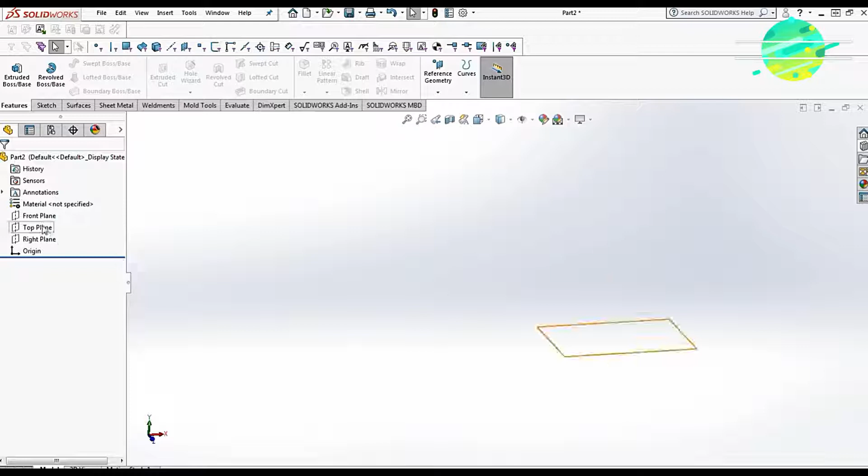With very simple steps, just select the top plane. Once you enter the sketch mode, select the ellipse and draw an ellipse. Make sure these 3 points are in alignment, so I will take this as horizontal.

Now I have to provide the dimension. I have to select the dimension tool, so provide these dimensions as 150, provide this dimension as 150, 150.

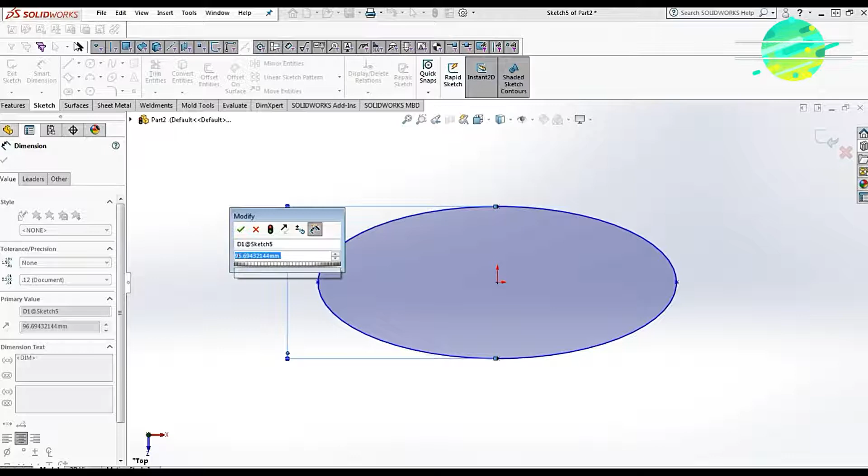Okay, the other side you select 300, 300. So once we update the model to 300 millimeters, say okay.

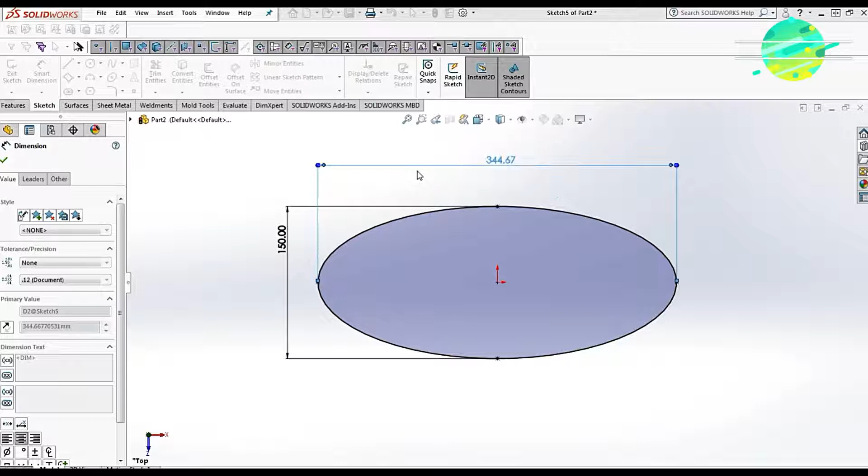After this you just extrude this one to 100 millimeters, and say draft outward 15 degrees, then say okay.

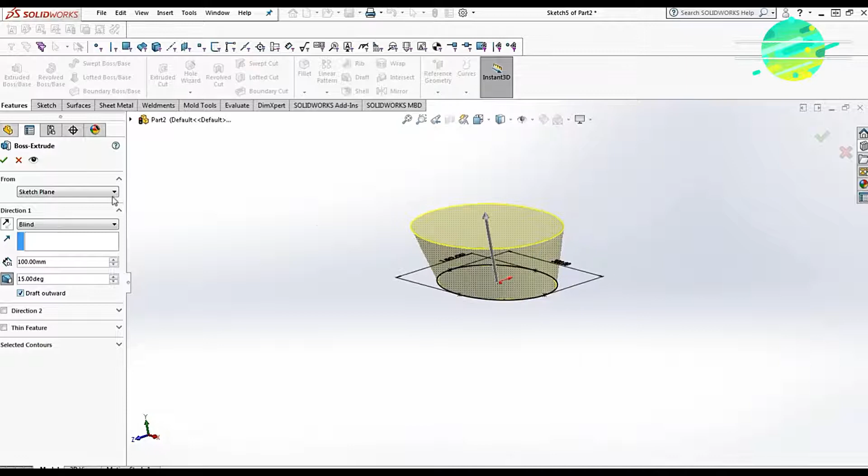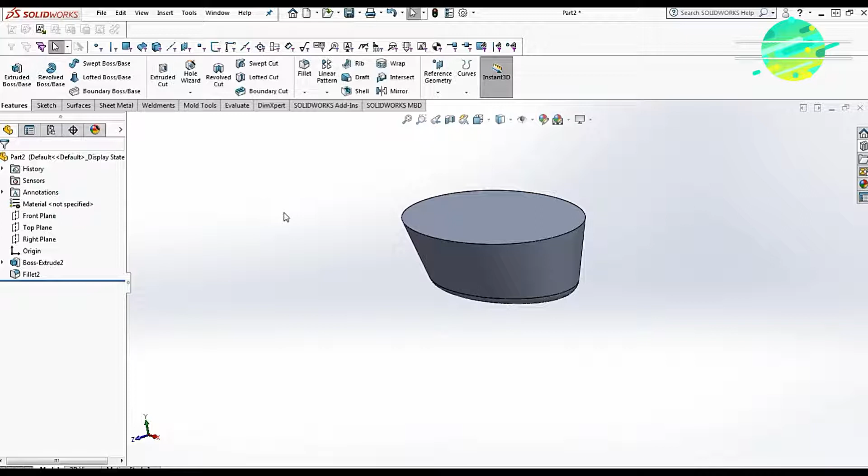Then if you want you can provide a fillet over here. We use fillet here because during molding the material flow will be easy, that's why we prefer more fillets, and also it will strengthen the part.

So just select this one, select shell, select the thickness as 2 millimeters, and say okay.

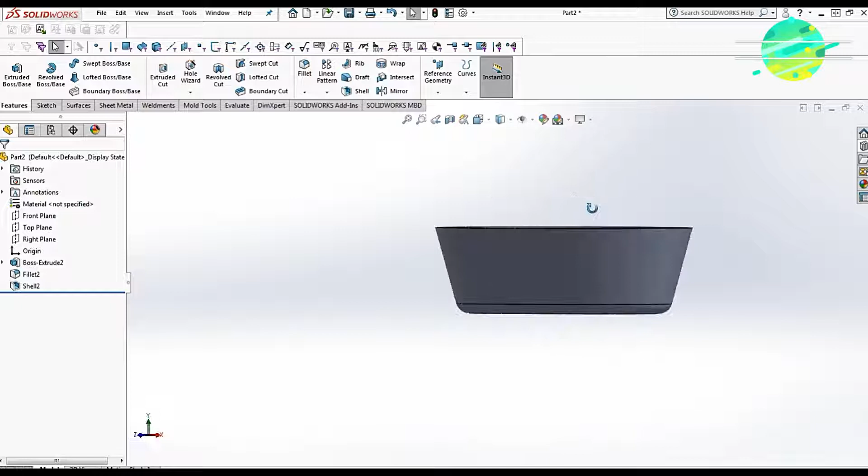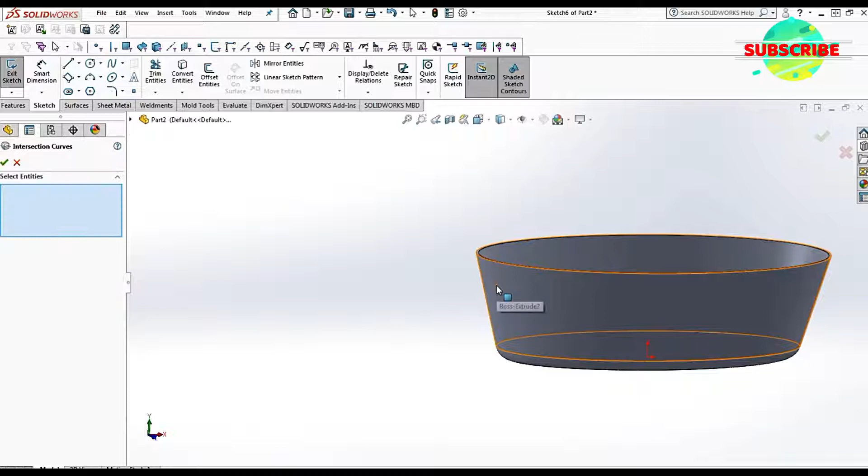After this, what we have to do is create a hole or a cut on this surface. For that, I will select the front plane and say insert sketch, then intersection curve. After this, select these two surfaces, say okay, then make it normal to.

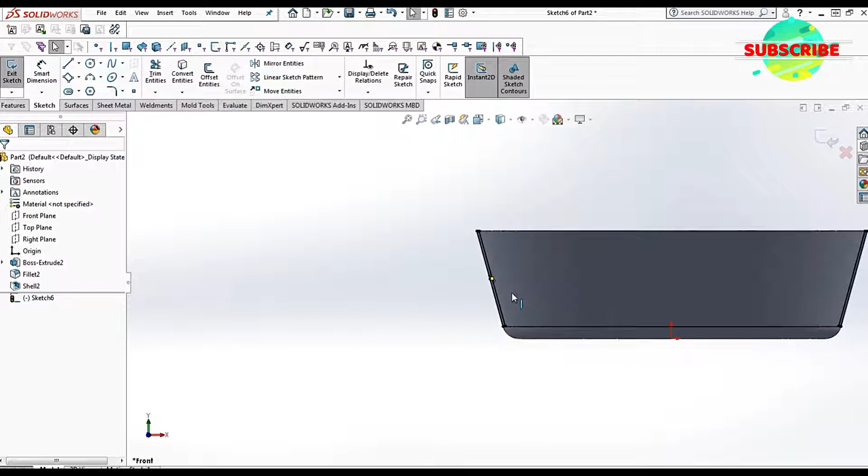Then draw a center line, or construction line, from here to here to make the cut perpendicular to the surface. I will come out of the sketch and in geometry, create a plane for this one. Select the center line and the point, and the plane will be created perpendicular to that line.

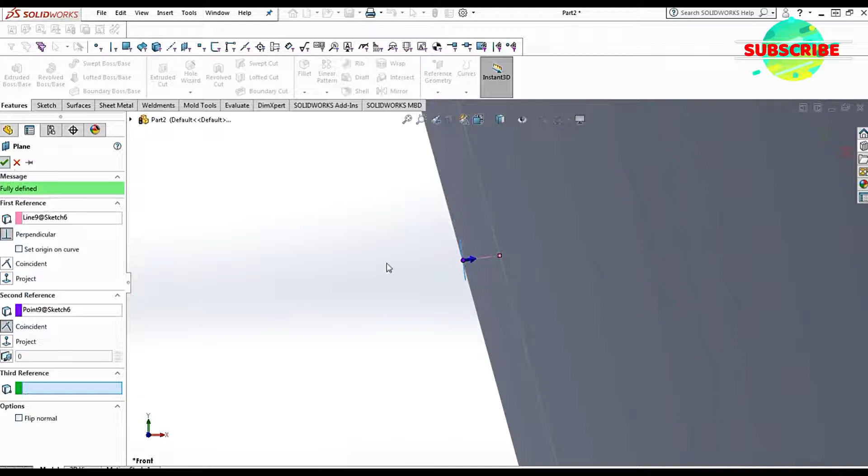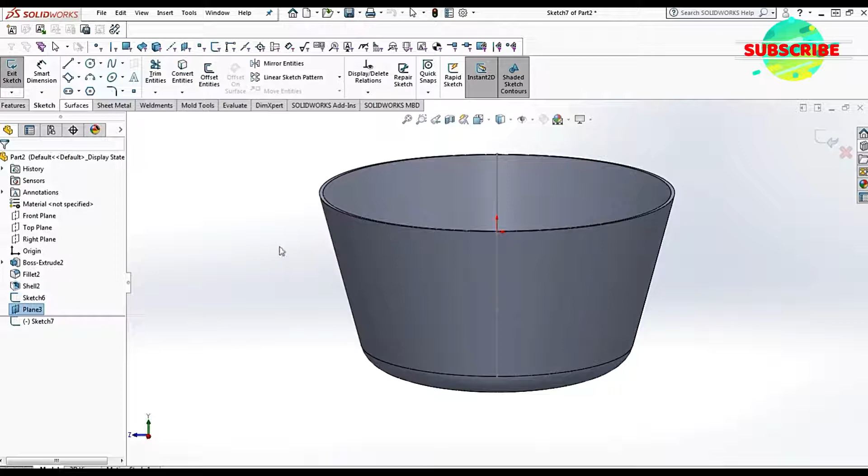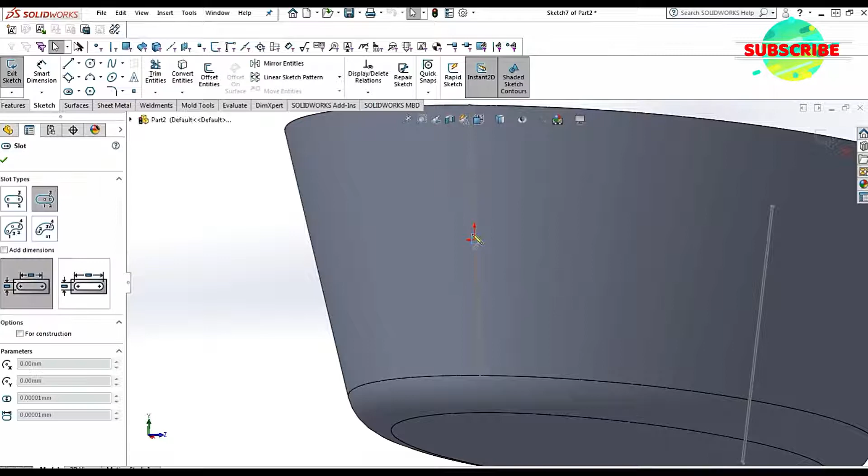After this, just select a sketch and then draw a slot, a straight slot. I will draw it in such a way which is vertical in nature. Sorry, I will select the straight slot, select this one, okay, say okay.

You can draw any profile, circle or triangle or whichever profile you want, but I am selecting just a slot here. So here I will give the slot this one as 8 millimeters.

8 millimeters. Then this one I will give as 50 millimeters. 50 millimeters.

After this I will directly extrude this one. Here what I will say is mid plane, I will take and say okay.

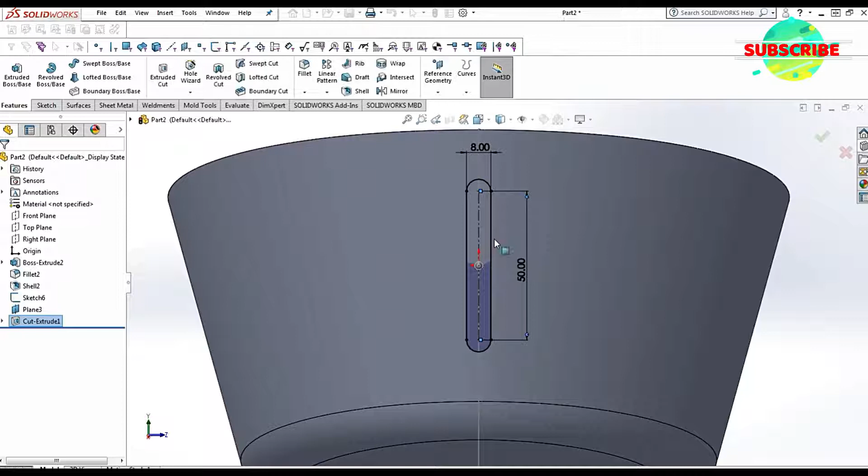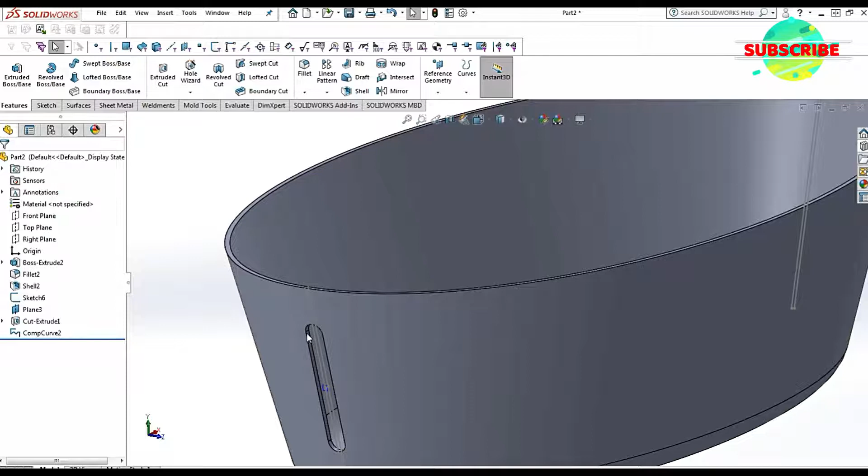After this what we have to do is create a composite curve to this edge, say okay. Then we have to go to the curve driven pattern. Here we have to select the edge, or we can select the composite curve.

Once we select the feature, it will automatically appear, and we can give the instances in such a way - equispacing, or we can give the distance between one feature and another feature.

So I am giving here approximately 30 instances, we can call it approximately 30, and they are equally distributed 30. So you can do this using composite curve, or the edge also you can use.

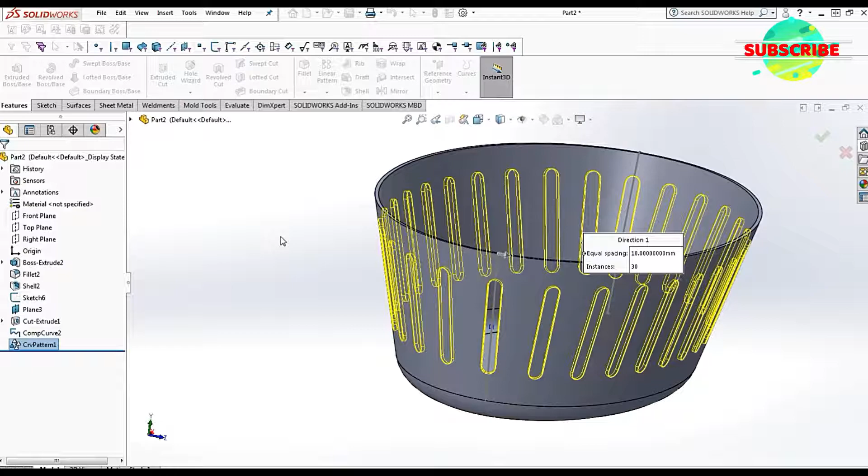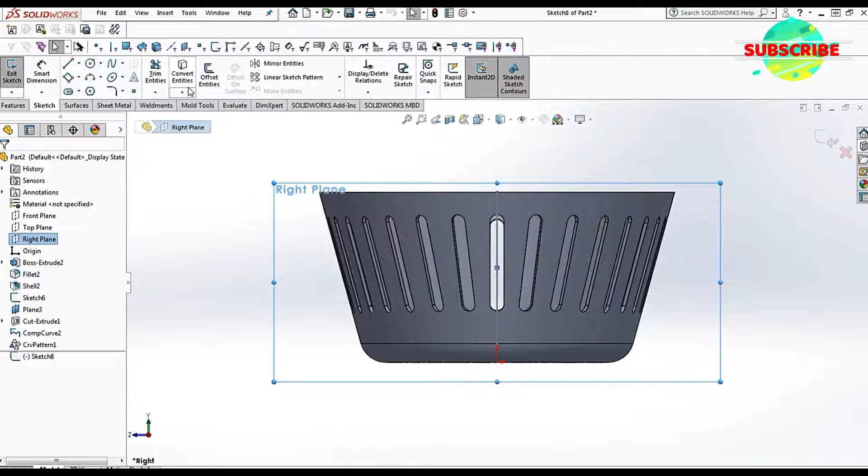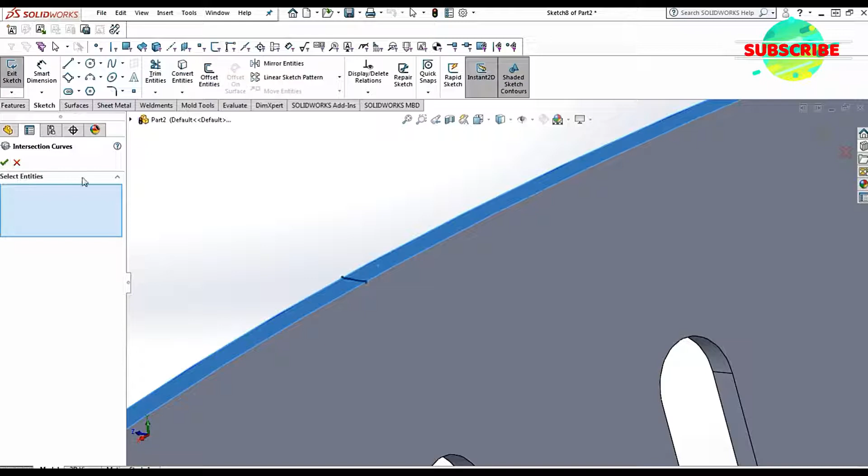After this, to produce one neck or shoulder, what I will do is select the front or right plane, select a sketch, enter inside, and say intersection curve for this face and this face. Let's see, actually for us these two, this one is enough. Say okay.

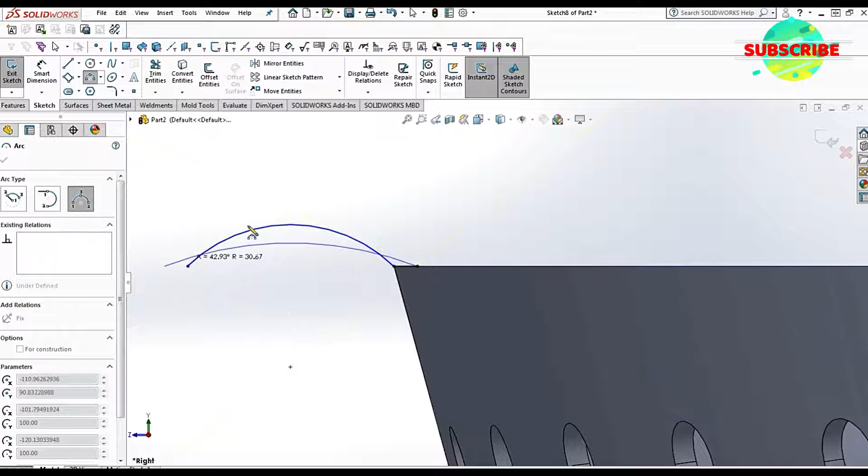Then after this, I will draw an arc over here and over here, and make these two coincide with each other. So this one and this one, or we can make the arcs concentric to each other, both are similar.

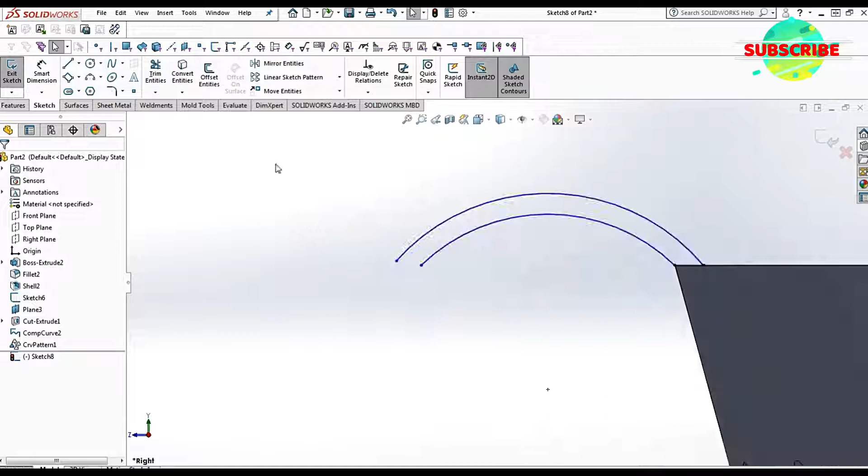So what I will do is draw this one. We can end like this also, which is perpendicular, but in this case I will take this one as normal to this one. So we have to extend it, it has to come here, just extend this one, just trim off the unwanted part.

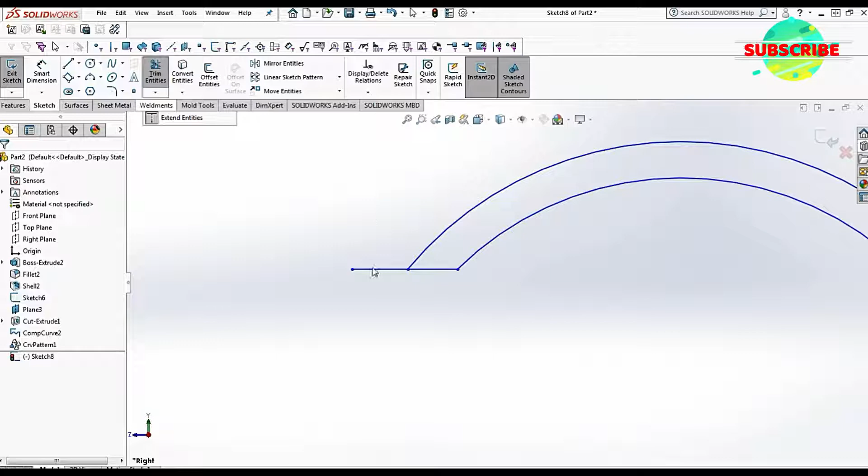So here, this one and this one are collinear, and this height we can specify. I will take this one as 10 millimeters.

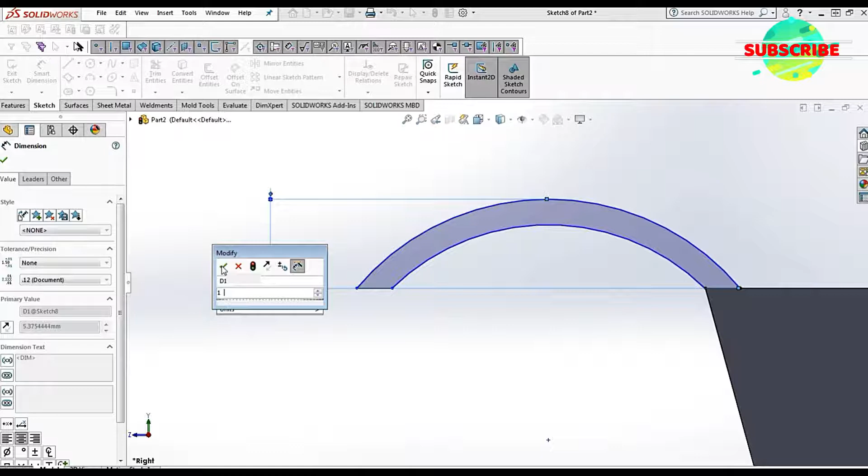Once it is updated to 10 millimeters, okay, then I will provide this one also as 10 millimeters.

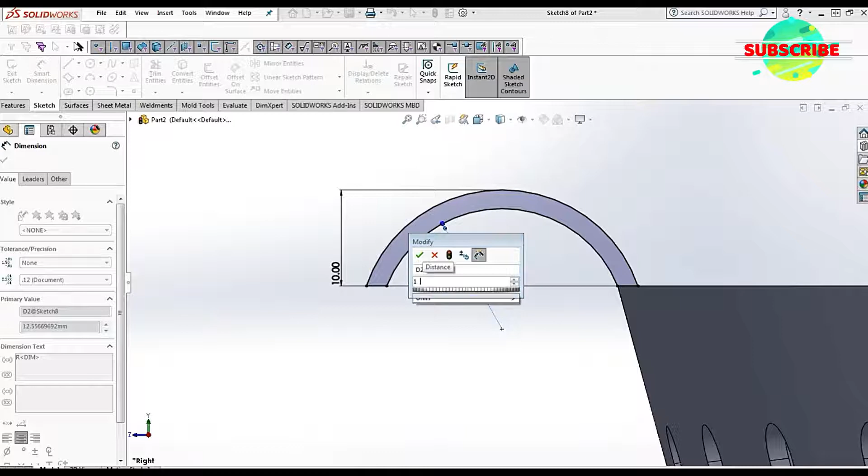After this, what I will do is go to the swept command. Here one problem is there, that is one more sketch is here, just delete this one.

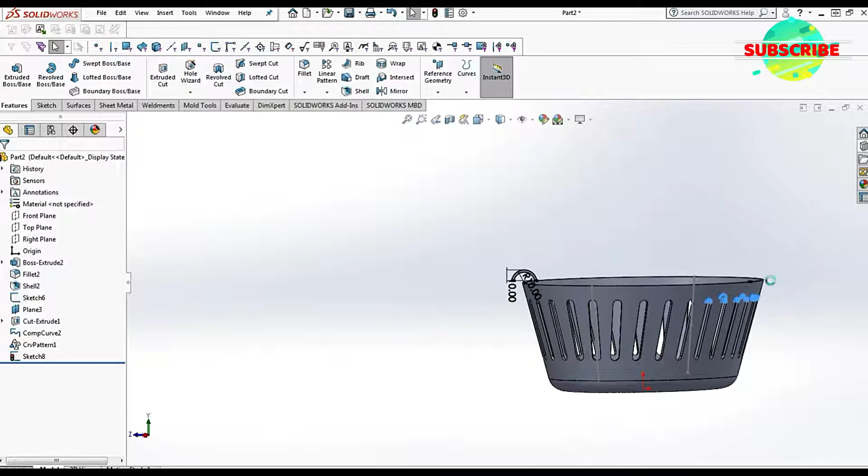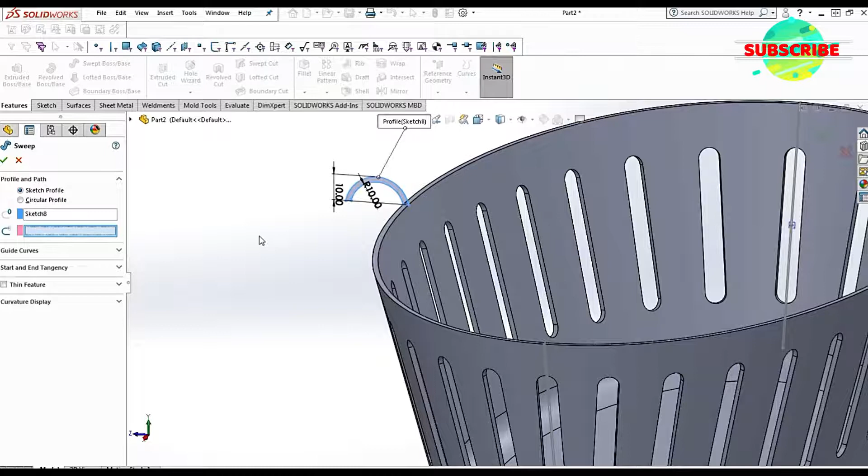Then just revolve, just select sweep, and just select this one will be this, and this one will be - you can select the edge, or you can select the composite curve. So finally it has been completed.

So this is how we can model a basket.